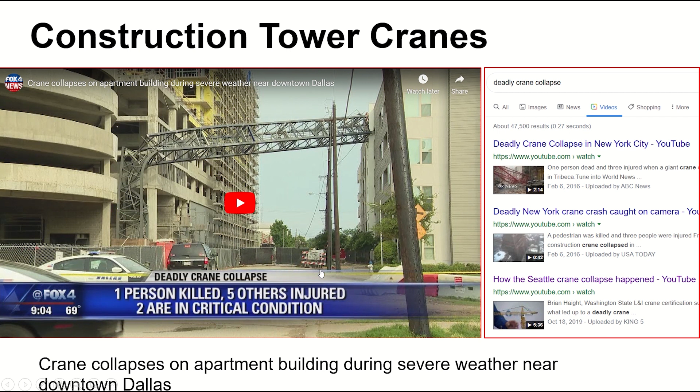So here I want to share a video of an incident, so you will learn a little bit about this incident. But if you search, just simply use a couple of words like deadly crane or deadly crane collapse, you will get around 47,000 results for this search. It means there are many incidents in terms of tower cranes or even mobile cranes. If you search, you will find those incidents. You will learn what kind of risks are associated with a crane or crane operation. So let's watch this video first.

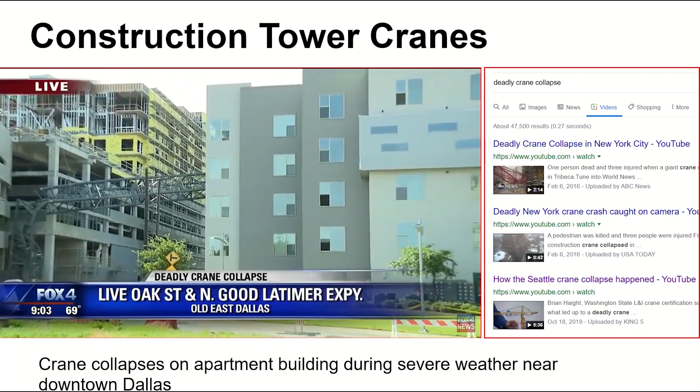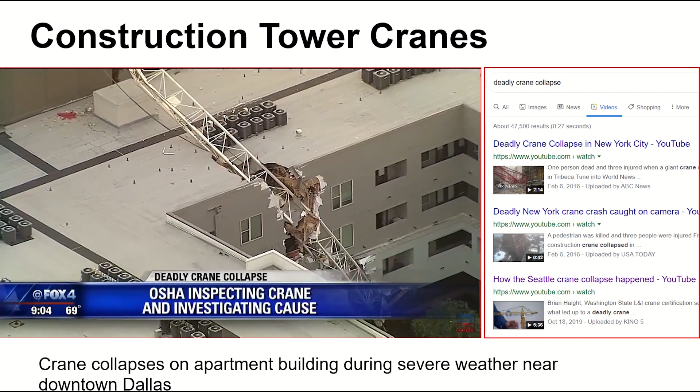Near this badly damaged apartment building, Dallas police officers, DPD, is providing round-the-clock security at this site. We also did see one construction worker from our vantage point. Now, behind me, you can see where this deadly collapse happened. The crane fell from an apartment complex that was under construction onto an apartment building that was nearly fully occupied. Now here's some video from Sky 4 this morning. Hundreds of evacuated residents are getting help with temporary housing from the building owner, Greystar, and the Red Cross. The evacuated residents are staying either in hotels or at other Greystar properties. Now this video shows the crane collapse from a distance. It's quite a ways away from the camera, but it does show the crane coming down. It crashed through the parking garage, then the building collapsed in.

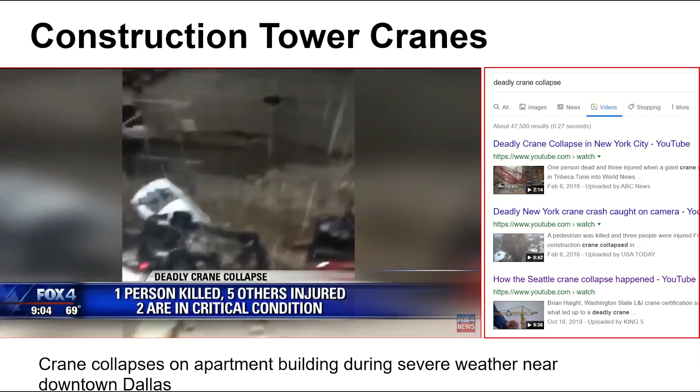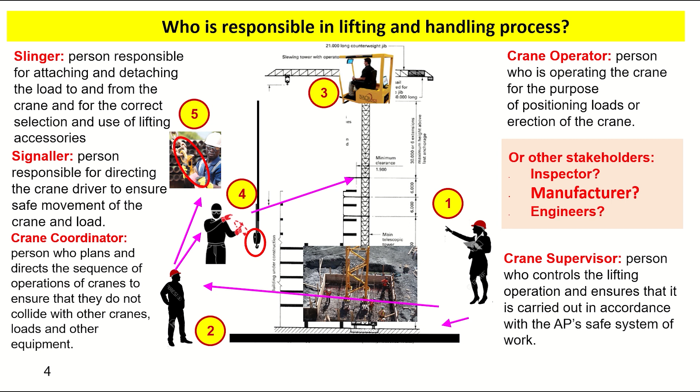So when an incident happens, of course it's going to be a long investigation process to see whether it is the responsibility of one person or a few persons. But it is more appropriate to do all that research and study before the operation to identify risks and prevent the incident. So here I'm going to talk